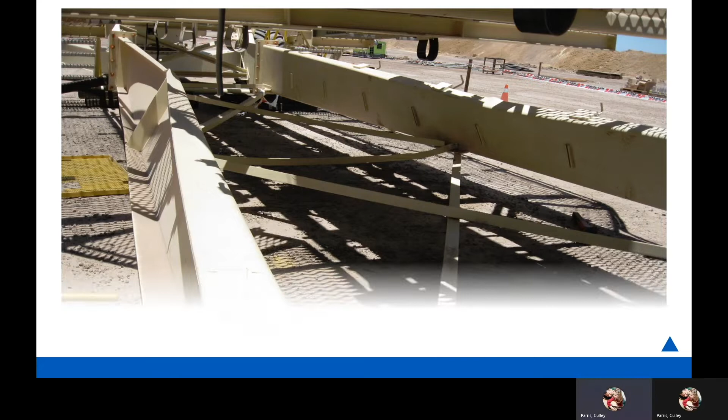So the overview of our presentation today: we'll jump back and forth between Matt and myself as we highlight some specialized tools. We'll introduce you to what our industrial focus areas are, and interspersed with that we'll point out some example projects that highlight the way that works. Hopefully throughout the whole thing, you're just seeing different ways that Kaufman and your company can join up, that we can support one another, possibly team, and in the end just make sure you understand how we can be of service to you.

There's a quick example—we'll actually go into this over the next few slides a little bit more—but specialized construction applications, sort of unusual. You know, we used this crane, but we didn't use the crane itself. We took the boom off and made this thing very, very short and stubby. Its primary purpose was just to help haul something up and down the face of an earthen dam where there was really poor access and no way to get debris and construction materials down to the area of construction, and we worked with the contractor together to develop this.

It was actually on the same project that we teamed with a large engineering outfit to support their proposal on this project in response to an RFP. And we developed this model here, just a real simple model that we developed using data that was provided with the RFP to demonstrate what our capabilities were to the potential client that we were teaming together with.

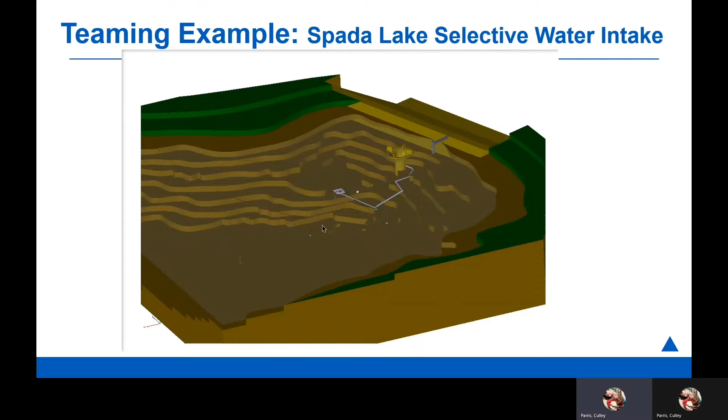We wanted to show this in response to the RFP and demonstrate how we might approach the problem. We identified how we were going to resolve their issue, which was utilizing a floating platform with an intake that had a variable elevation, allowing water to be pulled from a specific elevation within the pool above a dam, controlling the temperature of the water discharged downstream for fish.

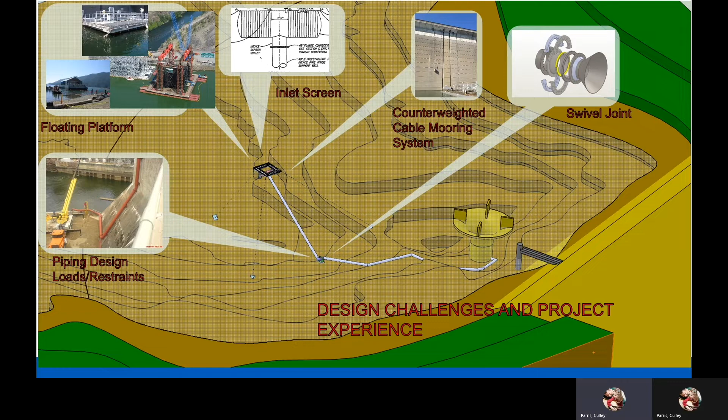We designed a custom swivel joint in a previous project and felt it was a good application here. So everything you're looking at is how we helped our client chase after an RFP and ultimately win it.

Once we were awarded the project, we walked the site and started talking to the client. We realized the solution we'd come up with before was actually already a selective water intake that existed as a bypass to another dam. We realized we could drill a hole through the hill and tap into that water supply.

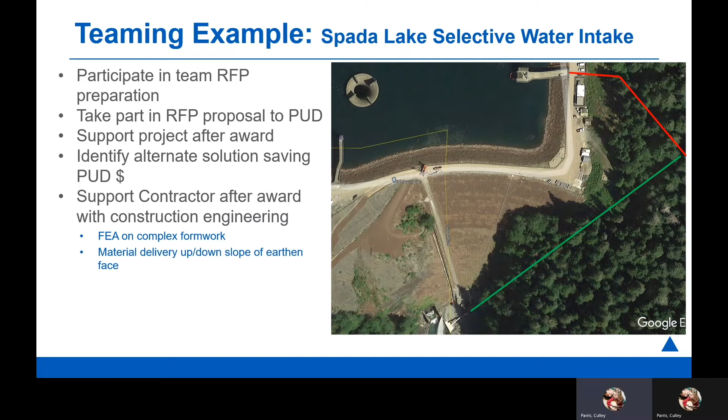In this case, we designed ourselves out of most of our scope, but the client got the best solution, and the engineering firm we were teaming with came out looking good in the middle of it all, able to supply their client with the best solution. That's what we like to do - make things work.

Moving on to some other multidiscipline services. These are just some examples we'll go through: structure modifications for pre-engineered buildings, construction access, construction engineering, engineered lifts, and forensics.

With pre-engineered metal buildings, one example is Hughes Marine, a boat supply manufacturer in Washington State. They had a pre-engineered metal building not originally designed for cranes, and they wanted to install new 5-ton cranes. The problem with pre-engineered metal buildings is there's no reserve or excess capacity in the design - they're very simplistic in nature.

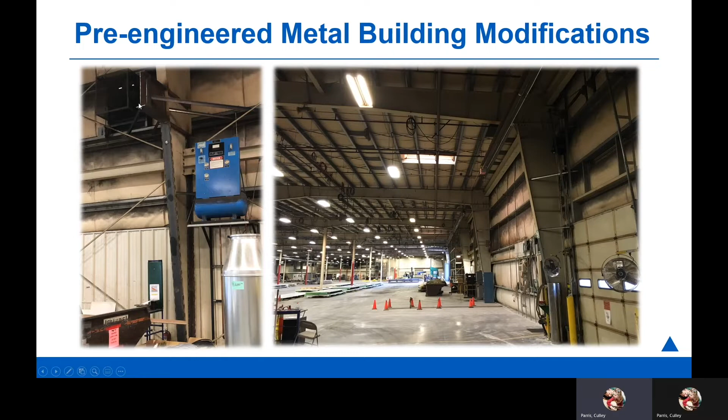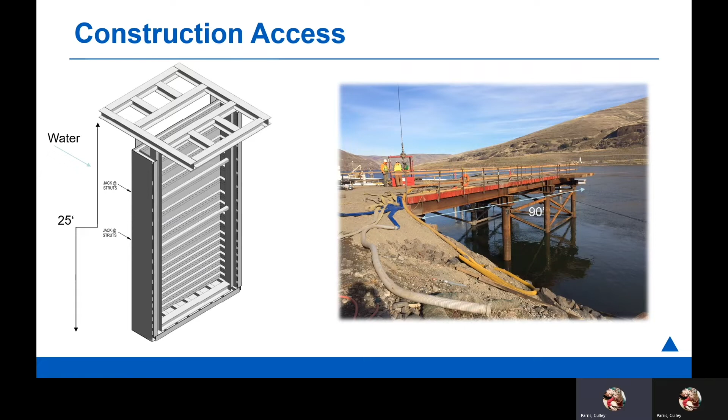Another part of this project, shown on the right, is a modular drilling platform built in 30-foot sections, 90 feet total length, with a drilling rig placed on top to drill 5-foot holes into the bedrock to support the fish flume downstream.

This was an exciting project we worked on together a number of years ago - a large floating platform that was a construction aid for Round Butte Dam. It's not part of the permanent installation, but to achieve the final installation they needed tremendous lift capacity with good accuracy right over the water. So this was a construction aid.

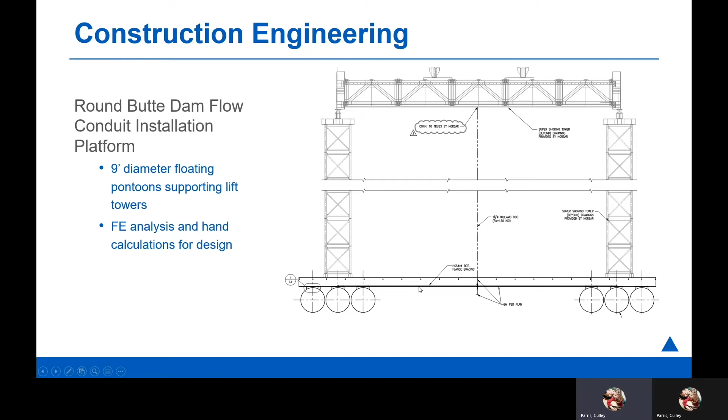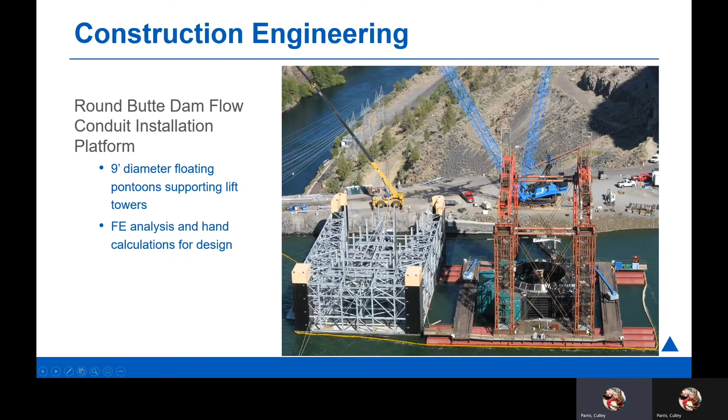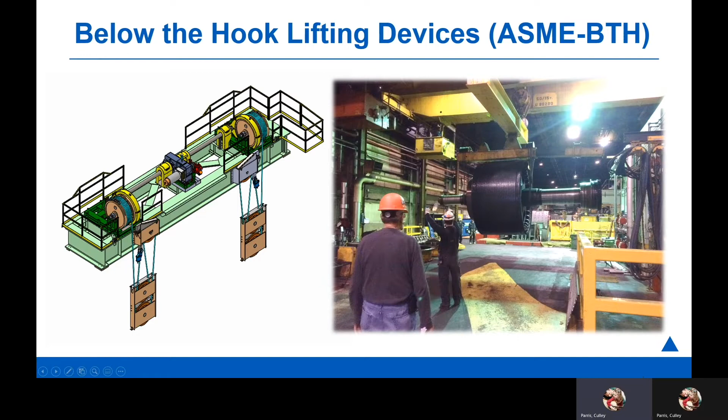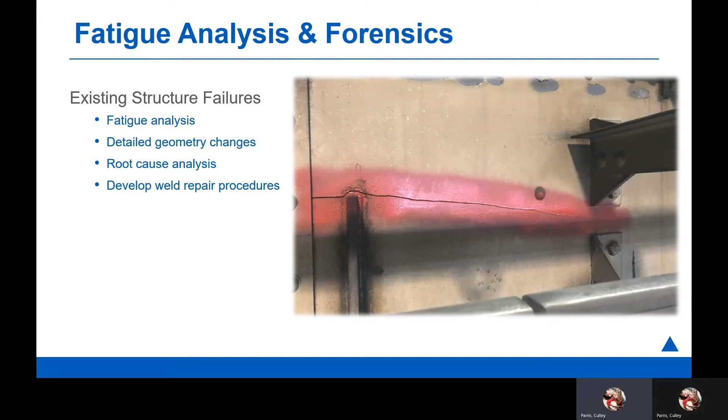We get into thinking about why failures have occurred, and that can include looking at the material that the crane girder is made out of, or perhaps the weld procedure, where that welding occurred, really to get at what the root cause was and what an appropriate repair procedure might be, whether it's a bolted-on fix after the fact or specific weld procedures to use to minimize residual stress and the chances of something like this repeating.

Some other unique markets that we get into: the grain industry, new and existing silo repairs or designs, OSHA code investigations, fall protection - obviously that's a big thing right now that we're capable of - cast in place municipal concrete water tanks, hydropower, fish bypass systems, and mining and material handling. We'll get into some other examples here.

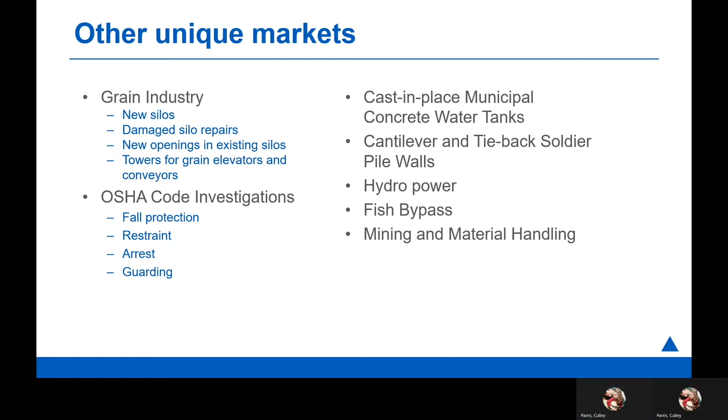Some of the specialized tools that we mentioned we'd be bringing up: 3D modeling that is joined up with scanning, and we've got a good example of that further down, piping analyses crossing a number of different related areas of the piping, more advanced finite element analysis, structural analysis programs, and Revit modeling that is multidisciplinary and allows great coordination for machine installations and manufacturing plants, things like that.

Speaking of oil and gas, process piping, we do a fair amount of this. We've got a whole section of our industrial department dedicated to that kind of work, and Luke Bergeron is the head of that. He's had really great success, and it's been a thrill to be along and part of that. I've supported projects here and there with finite element analysis, and those projects include things like natural gas, liquid fuels, and process piping and steam within compressor plants and other types of facilities.

Here's an example of taking some of these specialized tools. On the right, you've got a scan that was taken - this is a point cloud here - and you're seeing the model piping that's our modification installed together with the existing, so that we can coordinate and see maybe where things are gonna hit each other, where can we support piping, etc. And then pretty advanced piping packages for 3D design. When you're talking about more complex piping, sometimes it becomes very impractical to design in 2D.

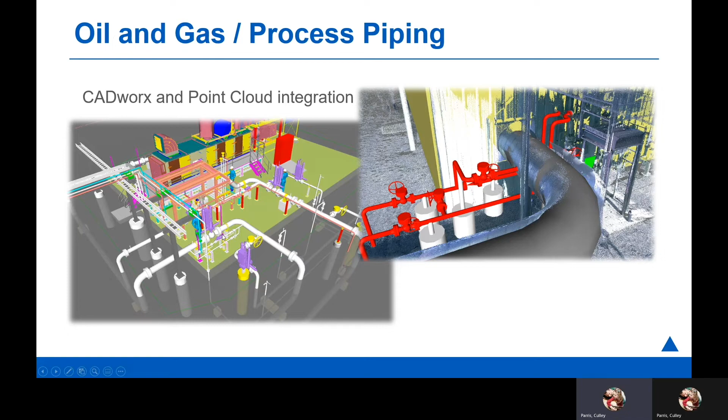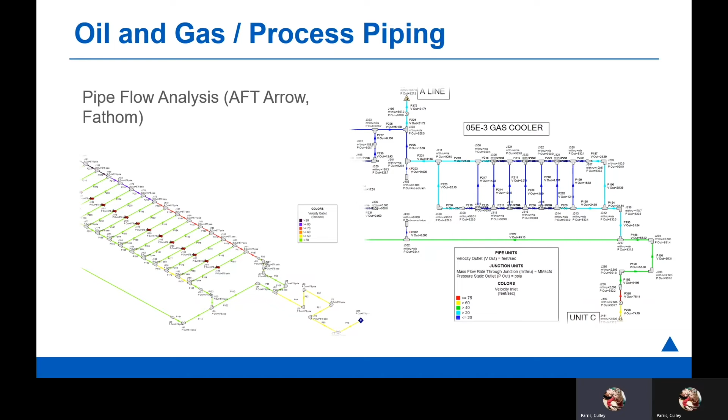We also use pipe flow analysis for both compressible and incompressible fluid flows. You're seeing a couple of larger networks that we've done. We've done as large as a campus steam distribution system and as small as a couple turns with a pipe and a nozzle at the end.

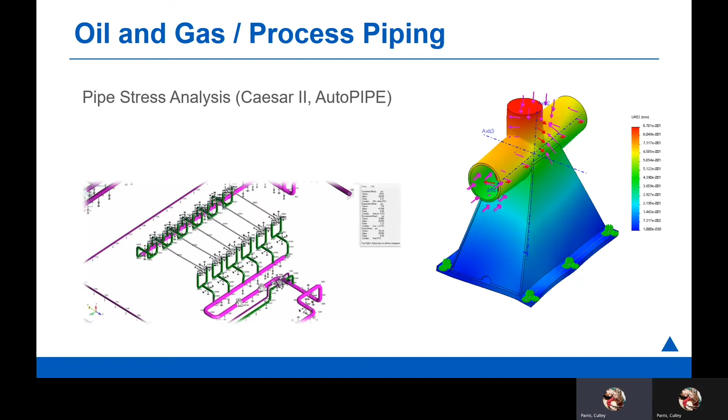When you put in piping, you also have to think about the stress that the piping itself undergoes. That can be due to seismic or thermal ranges, and we use Caesar II and AutoPIPE to perform that type of analysis. And then we can take that output and combine it with an FEA of, say, a specialized mount that has to be designed that you can't pull off the shelf, so to speak. There's an example of one on the right.

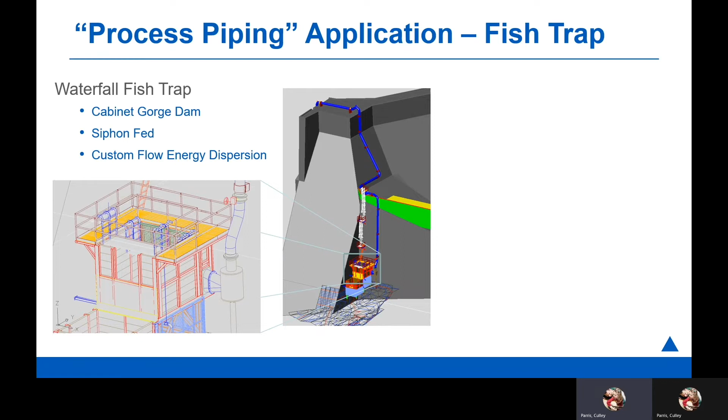Just wanted to highlight a small process piping example. We did incompressible fluid flow analysis on this whole pipe path, figured out how much energy we were going to have to disperse. This is water from the top of a dam feeding an experimental fish trap, and so we designed all of this custom and actually installed it, and it's been being tested for several years now. That's just an example of how we can bring all these tools together into a cohesive and synergistic design that really takes advantage of these tools without wasting time. There you can see an in-construction image at the top portion.

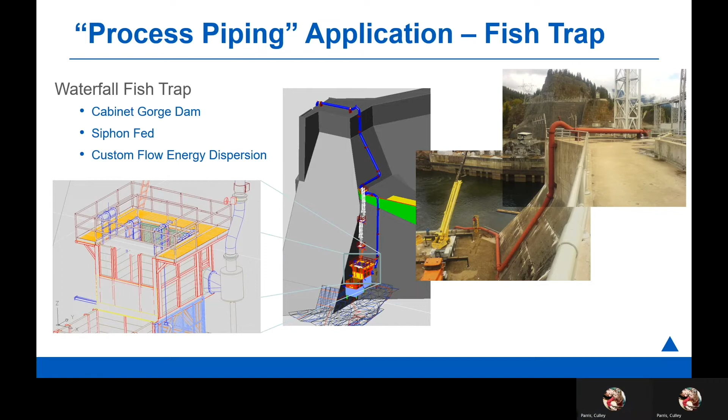Another example that we'd like to point out: here we have a connection. This connection is splitting because the model that our client put together and created was set up improperly. So what I would say is they had too much risk for the type of tool that they were using and not enough experience. Coffman has been using these tools extensively, and therefore have found that we can help avoid those types of risks. You could tell also there was a structural design issue here.

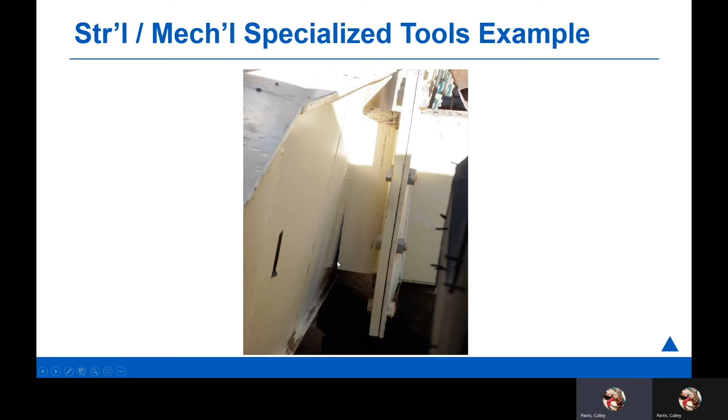Somehow somebody thought that one side of the flange could be a different thickness than the other side. That doesn't make much sense from a physics standpoint, but even without that problem, the primary issue here was that there was a huge moment in this beam that the client was missing. And we jumped in on site and helped resolve that problem and do analysis of other machines.

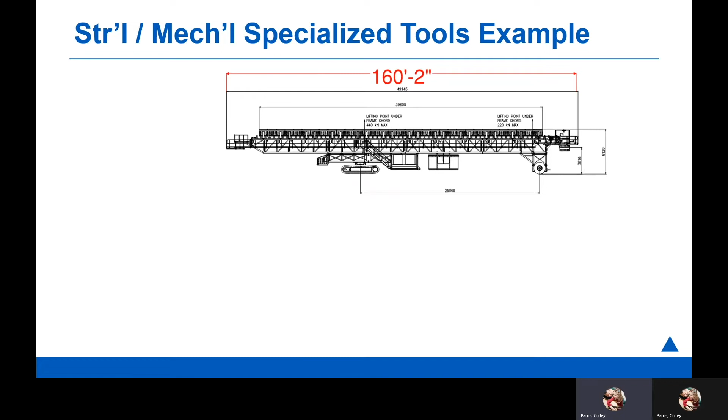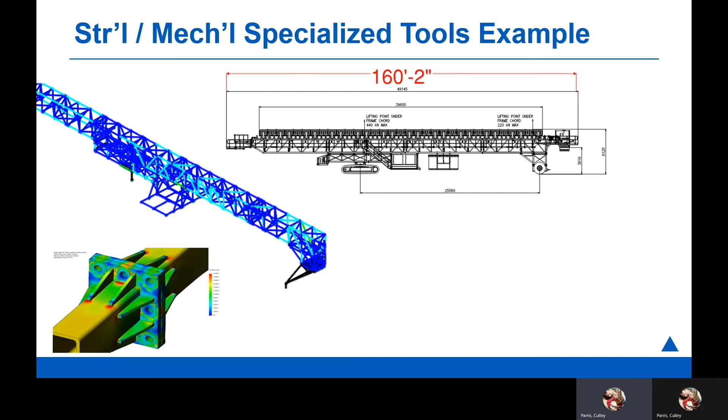Here's an example of one of those machines. We did stress analysis of the top portion of the frame. You're seeing the results of that analysis on the left. And then we took some of those outputs and checked highly stressed connections against custom bolt-up connections to make sure

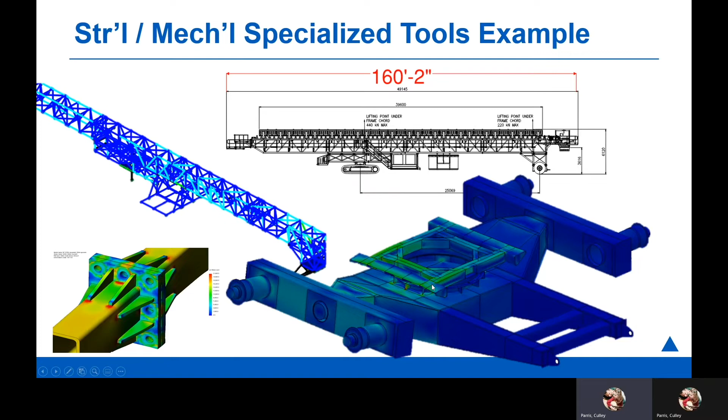that they could survive. And then we took the loads from the bottom and did this car body analysis, to see its deformed shape and where highest stresses might occur, and to validate that the design was effective and adjust plate thicknesses and that sort of thing as needed.

So we also take these tools and support large manufacturing installations. We've done this in a number of cases. Got a great example here of a building that's housing a stretcher as well as a lot of other related process equipment. And we had to think about existing utilities, the modification of those utilities, how to phase construction for existing work to go on, how to incorporate the OEM equipment, and to combine the remodel together with new construction.

And you can see here, this is one of our 3D scans of one of the large pieces of existing equipment that we were doing coordination with. We were designing some platforms that they could work off of that had to fit inside of the envelope of other portions of the machine that are already in place.

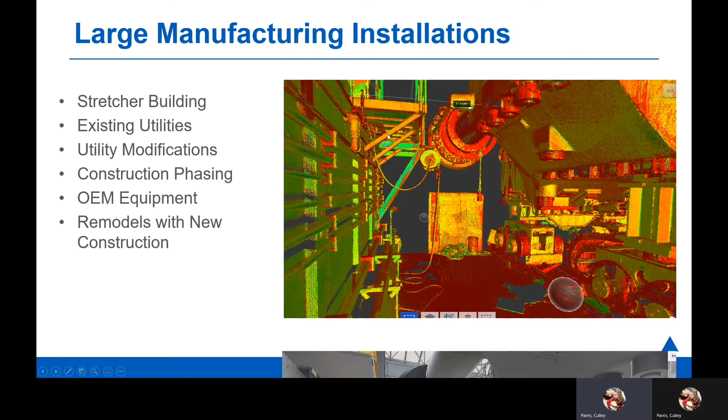And there you can see the physical Revit model that exists, which was a part of what we use. This is existing platforming, the existing machine in a similar position. So really it helped our client to visualize what we were proposing and for us to coordinate a design that worked well with what was already there.

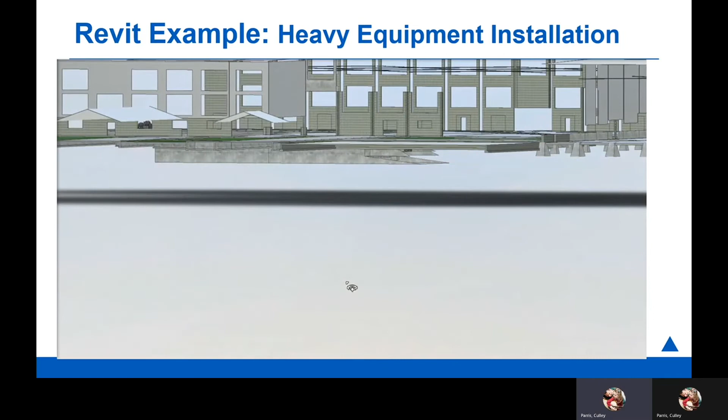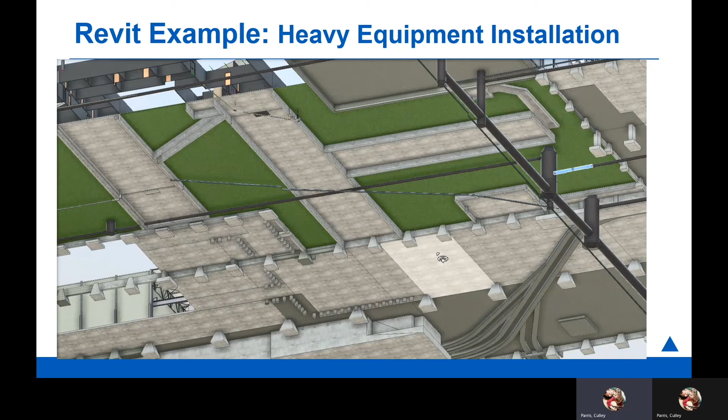So we've got a video here of that Revit model, and this is already a phased model. Portions of the buildings have been removed. You can see down below there are utilities that have been incorporated into the model, and we had to think hard about those utilities and how to phase them in and get around the pits that we were having to

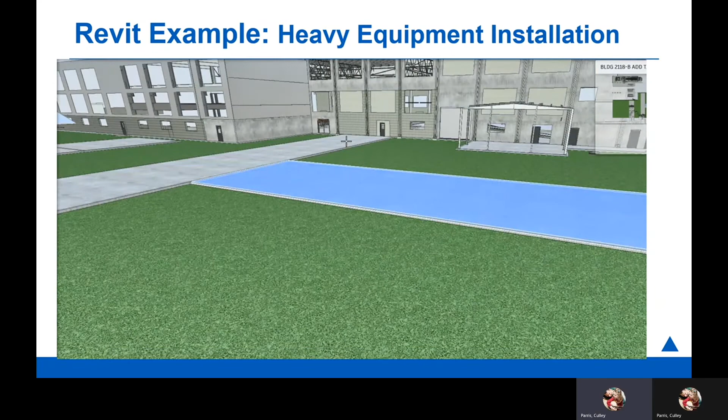install and that kind of thing. This is also a great way for our client to visualize just what their project might look like when you get inside. And so that's what I'm doing here now in this video, navigating into a location where you can kind of get a sense for how you walk through.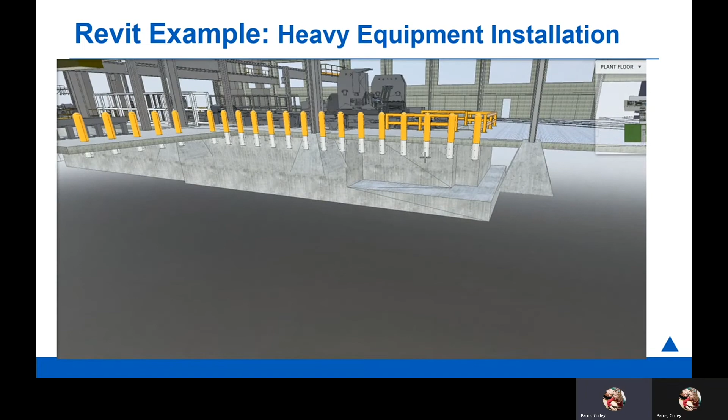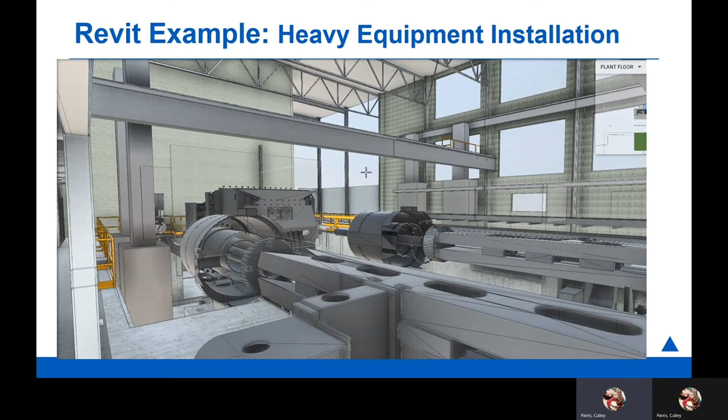Now the graphics take a second to update, so when you stop moving, they update and the client can see, oh, so now what does it look like if I move up to here? And so you move from point to point and get a good idea of how the equipment is going to interface with the building, with the foundations, with columns, with cranes and that sort of thing. And then we can use those to create 2D construction drawings that the contractor can use.

Now we get into some of the specialty projects that we've done over the years. They range from general machine design, hydropower and flow management with gates, cranes and maintenance travelers, custom one-off projects, structural, mechanical gangways, access platforms, elevators.

That example of that would be a passenger loading system onto a cruise ship. Multidisciplinary advanced Revit modeling, like Culley talked about earlier, and then emergency support and construction services.

Yeah, we really pride ourselves on trying to be available to our clients right when they have emergencies, and making sure that they get what they need as soon as they need it.

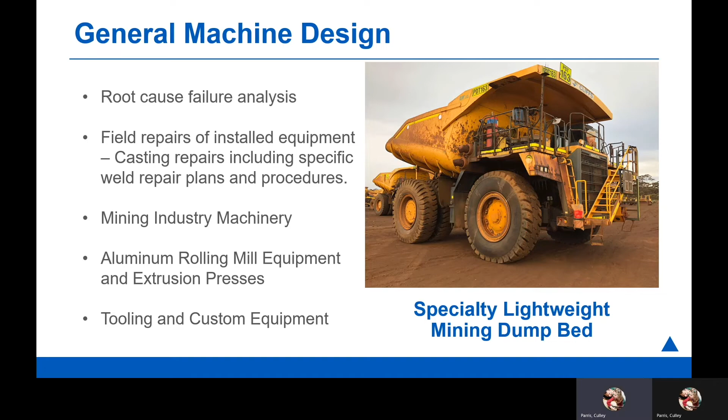We've already touched on some of these things here, but we worked on mining trucks like you see in this image here, specifically the beds themselves, and doing analysis on how they're supported and the structural integrity of the bed itself and the way it's supported.

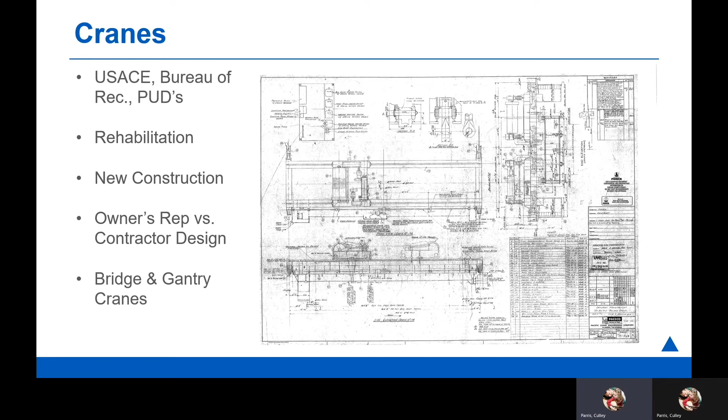Another one of our big focuses is cranes. Some of our clients are Corps of Engineers, Bureau of Rec, local PUDs, not only rehabilitation, but new construction as well. We do owner's rep and contractor design support services, and then various types of cranes - bridge cranes, gantry cranes - and modifications of those as well. Those could be really cool, custom design cranes where you can't just grab something easily off the shelf, maybe there's an offset lift or something like that.

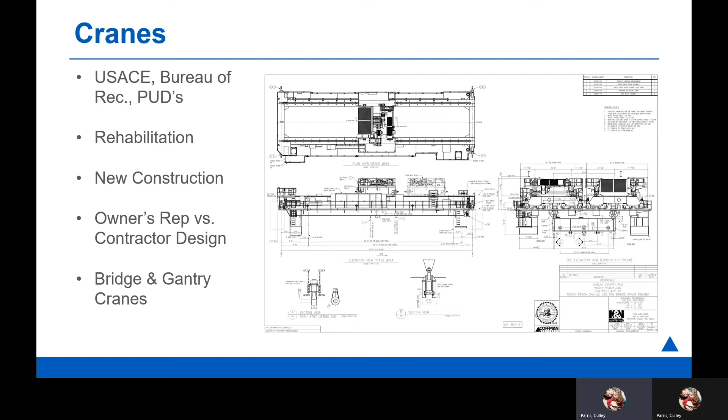That previous picture you saw was of the original design, and this is the updated design for a client here in Washington State. Here's a rendering of the trolley system. This was a 250-ton crane that was used in tandem with a second crane to lift 500 ton.

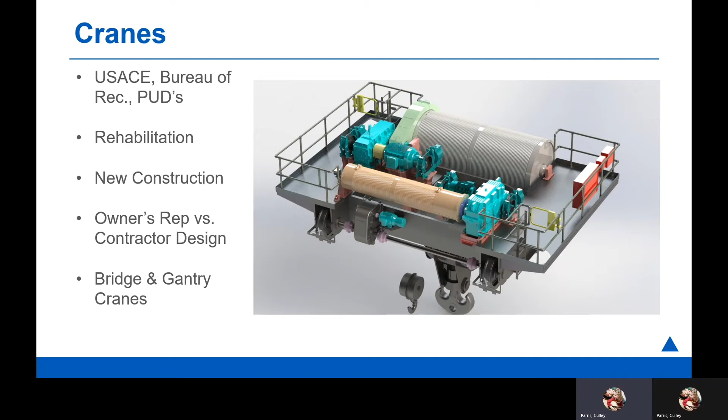Here's the crane picking one of the rotor blades you see there on the bottom right.

Maintenance travelers is a relatively new industry that we've gotten into. This is a picture of the Golden Gate Bridge. We're designing 16 new maintenance travelers that'll run inside, underneath, and along the side of the bridge, providing maintenance access and investigative abilities after a seismic event.

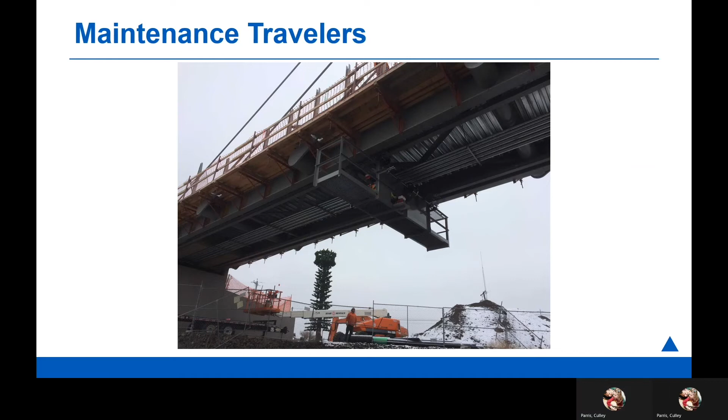This is a smaller bridge traveler here in Spokane, Washington. It's actually a unique little system - it's gas powered, so you can just take the motor off whenever you need to for safety reasons, and it provides maintenance access to the bridge span.

Hydrogates - similar clients to cranes. Rehabilitation and new design, assessments of gate hoist systems, and obviously spillway navigation, radial, and gate valves as well.

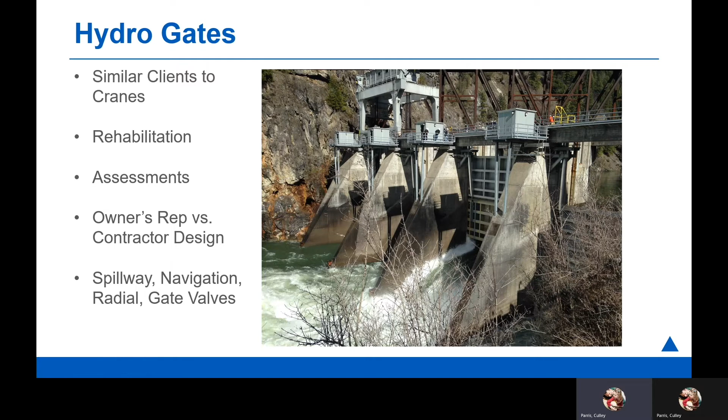This is a picture at Box Canyon Dam. This was a hydraulic hoist, so you see the HPU buildings there up on the piers, and there's hydraulic rods, 30-foot rods that attach to the lower part of the gate for water spillage.

This is another area where we supported a contractor. The Corps of Engineers had done the basic design of the gate, but had never considered how the gate might be lifted, how it would be transported horizontally, and if you could safely, without overstressing it, move it from that horizontal position to the vertical position, because it was fabricated in the horizontal position.

Kaufman performed a detailed analysis using a shell model and SolidWorks simulation for this entire 104-foot tall gate, and we ended up designing in a modification. These beams you see here are the modification, together with these custom lifting points up here. We were able to demonstrate safe lifting of this gate and to perform that lift.

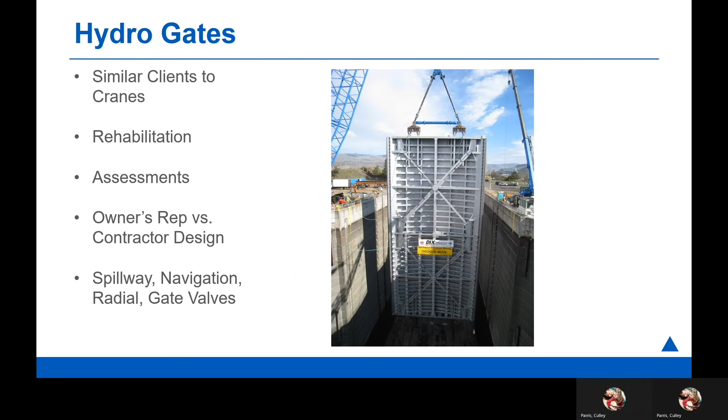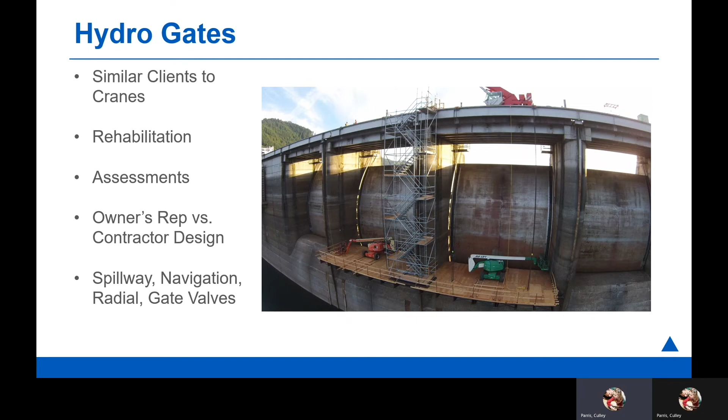This was a maintenance access project at Lookout Point in Oregon. This is just another example of how we can work with the contractor to provide safe working environments.

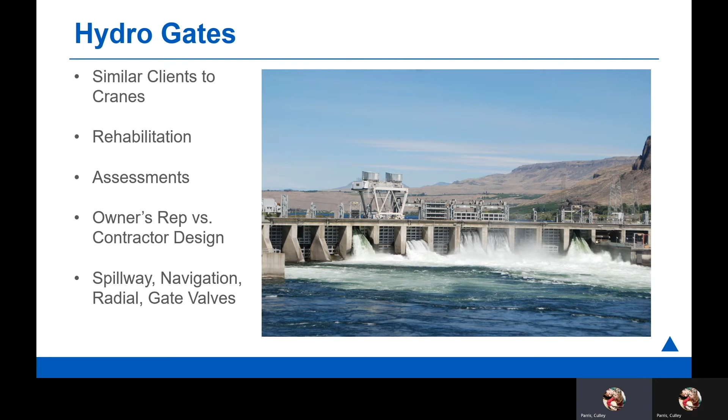This is a picture of Rock Island Dam in central Washington. This is the 250-ton gate hoist that we looked at earlier, and again, the rendering of that system.

Some custom one-off projects - this was a fun one that we got to work on. This is a tourist elevator at Grand Coulee Dam. It runs up the face of the dam at a 45-degree angle. It was built back in the 70s and has been decommissioned since the 90s. We provided a phase 1 assessment for the upgrade of that project, and hopefully that moves to construction in the future.

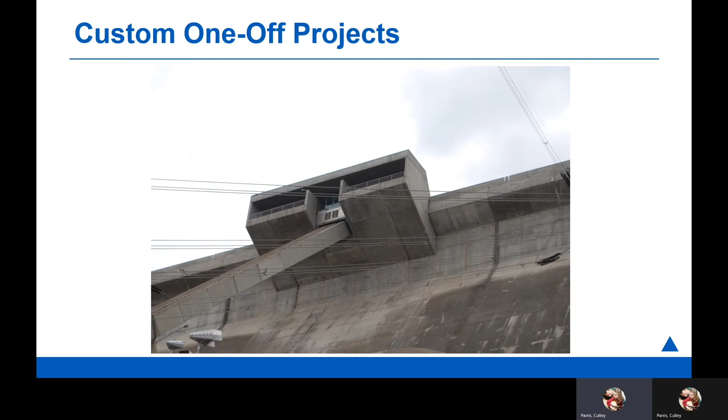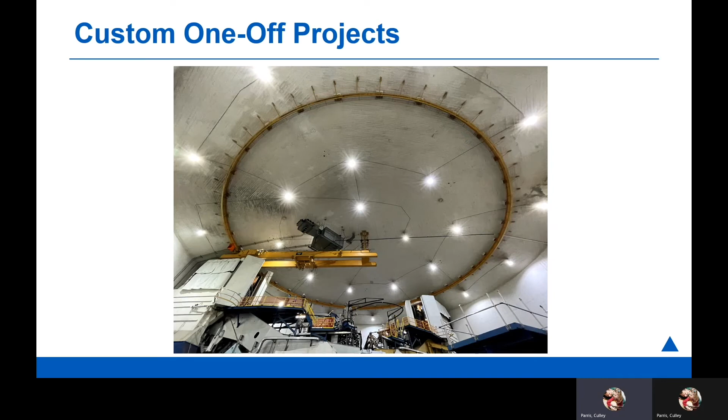This is a radial crane at an electron accelerator facility in Virginia - we do those every day, right? We provided a phase 1 assessment and then wrote the project specs and drawings for the rehabilitation of this crane. The problem they were having was that the rails from the beginning were not installed at the perfect radius, so they were getting significant thrust loads at the wheels and excessive bearing wear. We designed a custom slide system for the trolley to compensate for the out of roundness in the rail system.

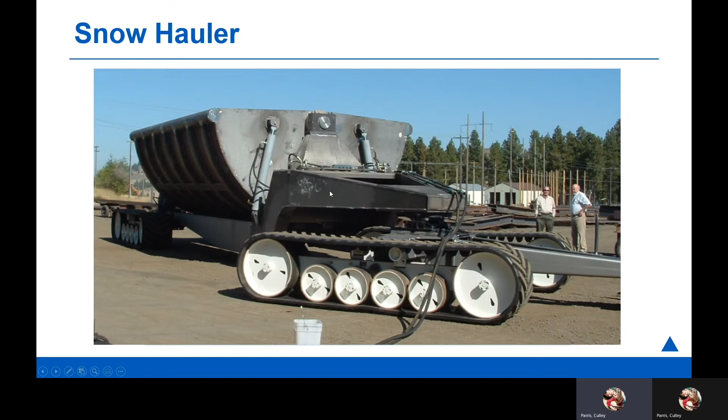This is a picture of a snow hauler that we supported the design of, basically developed from the ground up, with the exception of these large wheel sets which were purchased components that we then combined with our custom design. We did finite element analysis of the snow hauler. It's a dump bed, so it uses hydraulics to push up the sides and just belly dump, then drive over the pile that it's left behind.

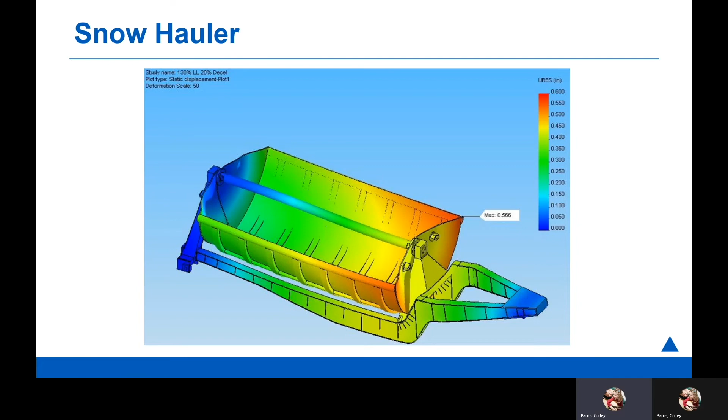Pretty interesting project. It had specialty requirements related to the low temperature that the steel would face, so some unique challenges there. This was early on in our use of SOLIDWORKS simulation. We've gained a lot of knowledge since then, but the design has stood the test of time.

This is a passenger gangway system for Carnival Cruise Lines in Long Beach, California. We did the mechanical systems for this, and the unique aspect is that the platforms actually move up and down with the tide while the ship is docked, and then has some safety features for breakaway assist and things of that nature, but that was a fun project as well.

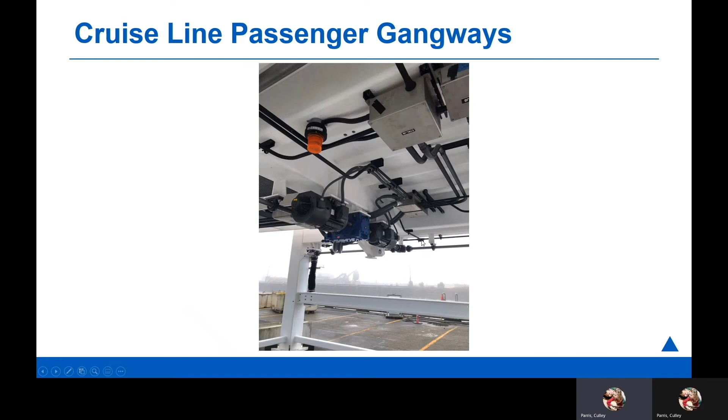Here you can see a close-up of the mechanical systems. In the far background there, you can see the jack screw. It's got the boot on it right there, so you can't see the screw portion, but that's the jack screw that moves up and down.

And then this was a fold-out platform to provide access for the passengers.

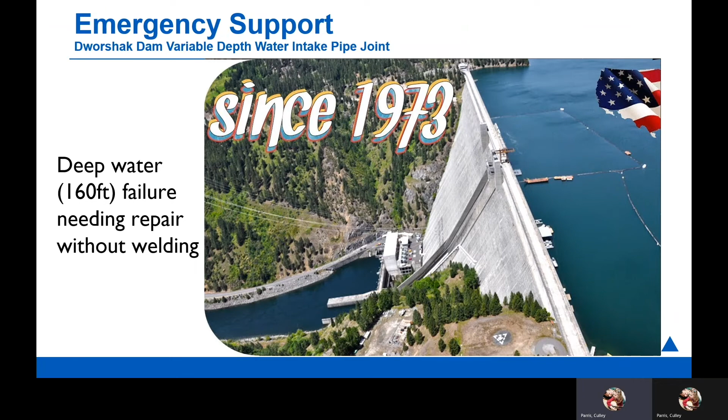So emergency support, we've been helping out clients for a long time doing this, and we needed in this case to provide emergency support for a damaged component on the high side of the dam, 160 feet deep, and we needed to do that without welding. The reason being, it was going to be really difficult to do that welding at those depths.

An accident involving the support of the heavy end of this intake screen had caused the intake screen to fall without support, and it weighs 10,000 pounds. Even underwater, that's too much load with this kind of moment there, and it wrenched right off the face of the dam.

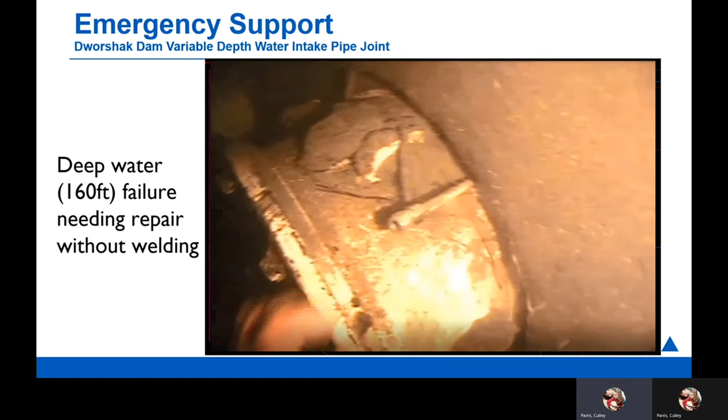So we got a little video here. We were able to see the condition of that connection down low. Obviously, we're joined up with a contractor here who had pulled in the support, and you can kind of hear the diver. His voice is all whacked out because the pressure is so high.

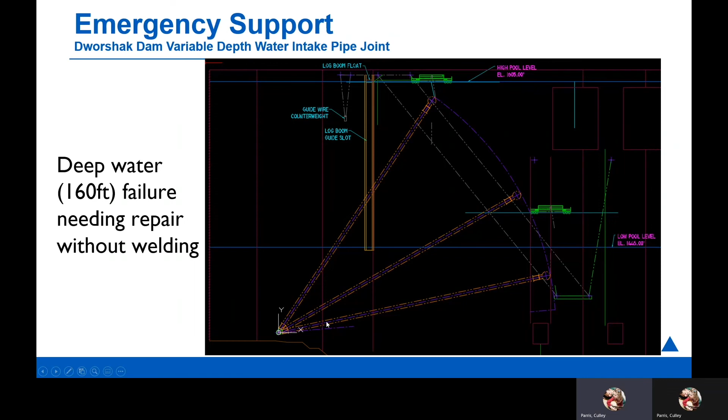The point is, we were able to determine a new solution that did not involve bending of this pipe. So we were able to take the load out of this connection and design a new swiveling joint, which could be assembled below the surface by divers and not put them at risk, and be robust. And that's been operating to this day.

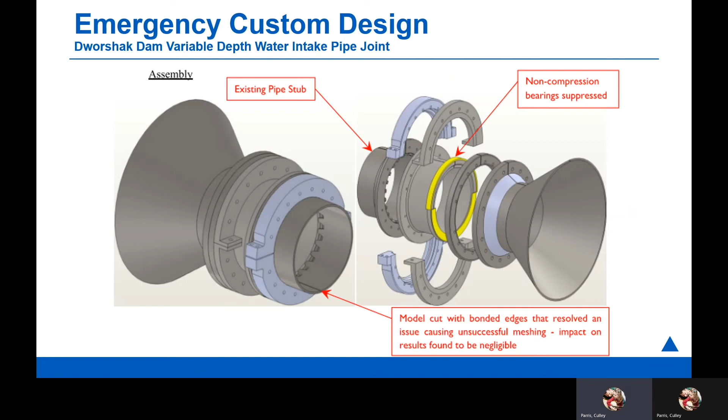We performed some calculations ahead of time in the shop to figure out how much load we thought would be required to rotate this thing, because we wanted to make sure that the way it was installed, the joint could freely rotate, but it was still pulled tight. You can see right at the torque that we had predicted, he's able to get it to move without snapping that torque wrench. That was a confirmation that we had a properly assembled component.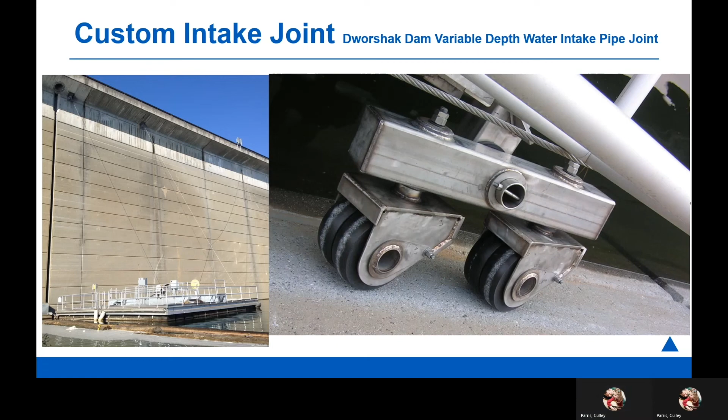In general, what we're doing is taking challenging designs and design challenges and addressing those issues with tools that fit the need. We're talking about fatigue, which represents 80% of failures, but is something that a lot of times lives outside of prescriptive code, and that owners and operators don't always understand very well. Specialized software tools are dangerous in that garbage in means garbage out, so you need somebody working on these who understands the limitations and how to use the tool effectively.

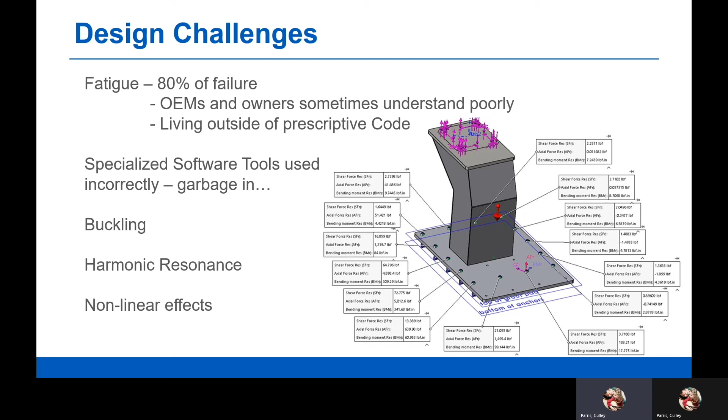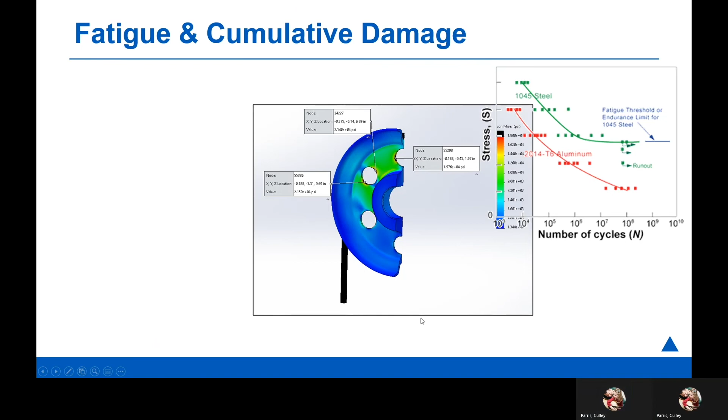And we're looking at not just stress, but also buckling and harmonic resonance and nonlinear effects, both geometric and material. We'll do cumulative fatigue analysis and look at specific components like this here. We were modifying a sheave design to fit what the contractor needed.

Here we're talking about a large stretcher system where we were able to install strain gauges and compare the strain gauges to actual finite element analysis that we had done. We saw a great, within a few percent level of agreement between our prediction, and then to come up with what we predicted would be the damage, the fatigue damage that was occurring to this machine.

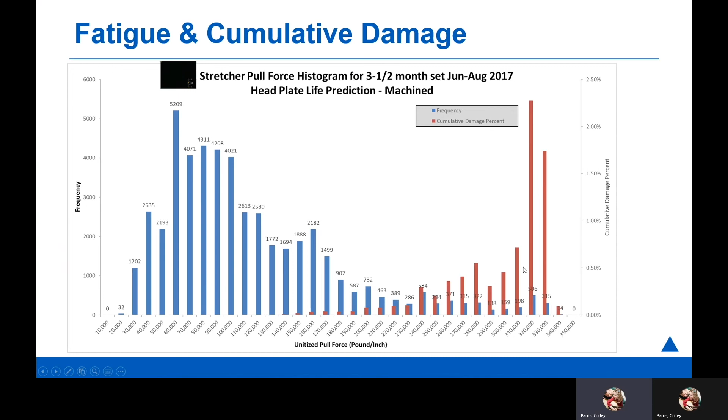So the red bars here are the fatigue damage, and the blue is telling you how many stretches they do at that load. And so over here on the right where the loads are high, they're not doing very many stretches, but they're doing most of their fatigue damage. And so we were able to help our client improve their operations, watch for and interrupt pulls that were problematic, and just develop a machine management system that was robust and allowed them to really understand the kind of fatigue life they might expect from their machine.

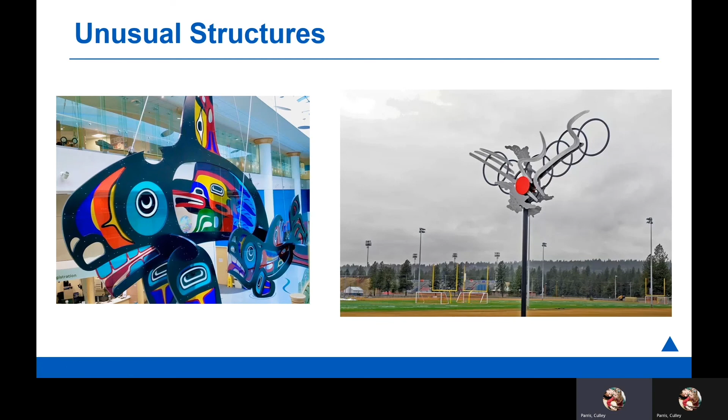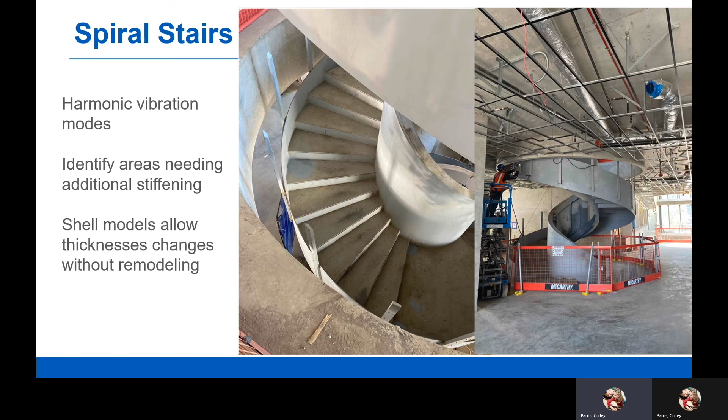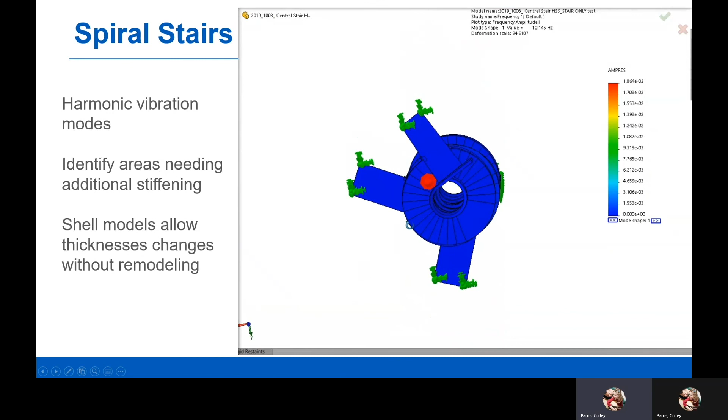We've also helped out with spiral stairs, looking at them from a harmonic vibration standpoint as well as a stress standpoint, identifying areas that needed stiffening and really validating what is a beautiful part of the structural design, but also a high-risk part if it's not understood correctly. So you can just see we were able to picture what the vibrational modes were of this platform and understand at what frequency they would occur.

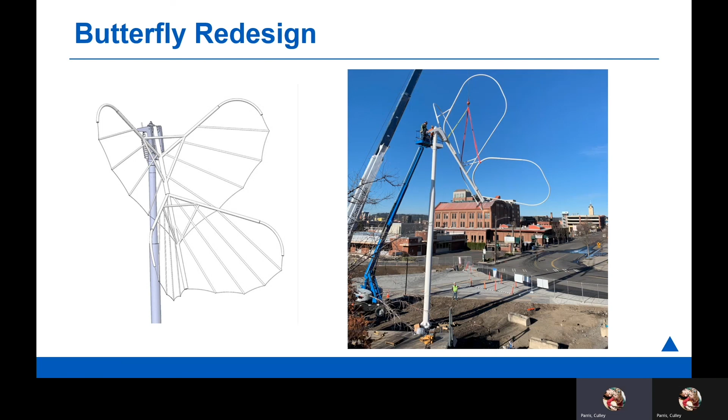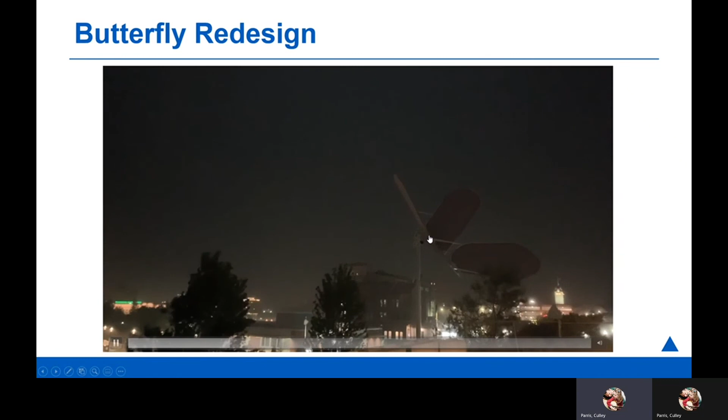And then lastly, just another art piece, a very large butterfly, and sorting out how to support and suspend this thing and counterspring it and allow it the accommodation for high loads that is needed to prevent shock that causes premature failure. We really identified in stormy weather that this thing was seeing pretty high loads, especially loads associated with sudden changes in direction which cause a twist of the butterfly, and there was no allowance at the center there for the twist that rotates over, and you can kind of see that twist right here in slow motion as it

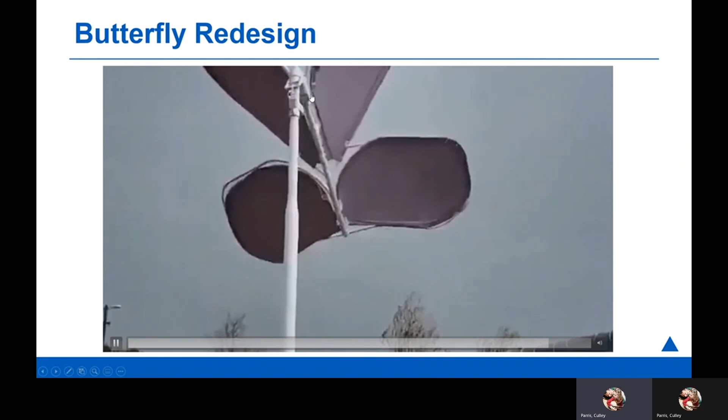suddenly goes to the side. And so in our redesign, we're addressing that and creating the ability for it to absorb shock in that direction and reduce the overall stresses.

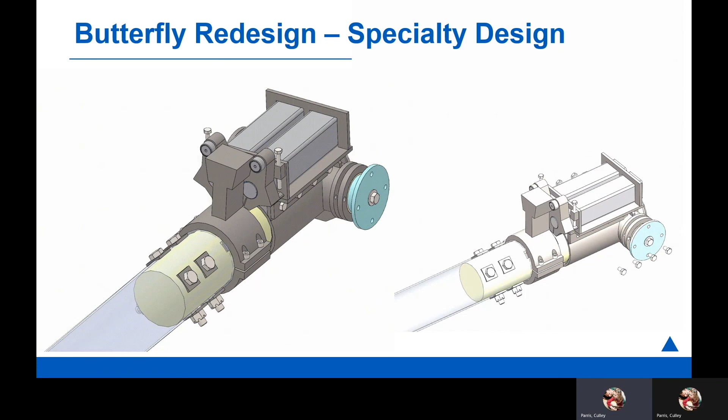This is a picture of the mechanism that we've developed. Obviously, you're not going to understand it in 30 seconds of looking at it, but the point is we've come up with a maintainable system utilizing pre-designed torsion axles that would go like on a boat trailer, and use them in a unique way combined with fully custom designs that allow our client to have a safer installation that's going to last far longer.